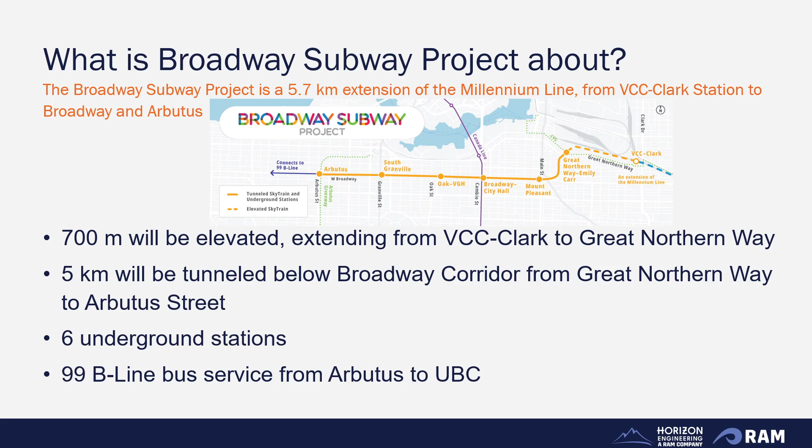In total there are 6 underground stations, and at our terminus station we have the B-Line service connecting to UBC. I believe this station is the longest of all, about 330 meters long, spanning across 2 city blocks from Arbutus Street to Cypress Street.

All these pictures I'm going to show are downloaded from the Ministry of Transportation and Infrastructure website, which is widely available to everyone. Let me show my pointer.

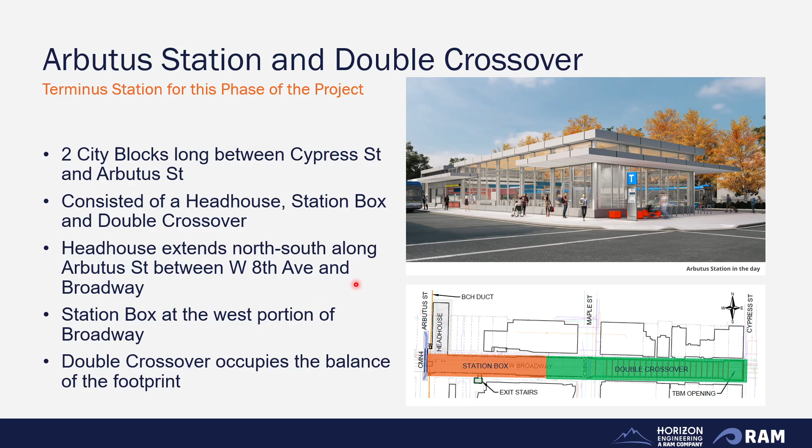Now we talk about our excavation requirements. Overall, the depth of excavation is about 18 meters, and in some areas it's as deep as 20 meters.

It is a vertical shoring design to support adjacent buildings, both at grade and multi-level underground parking. It also needs to support the traffic deck and underground infrastructure.

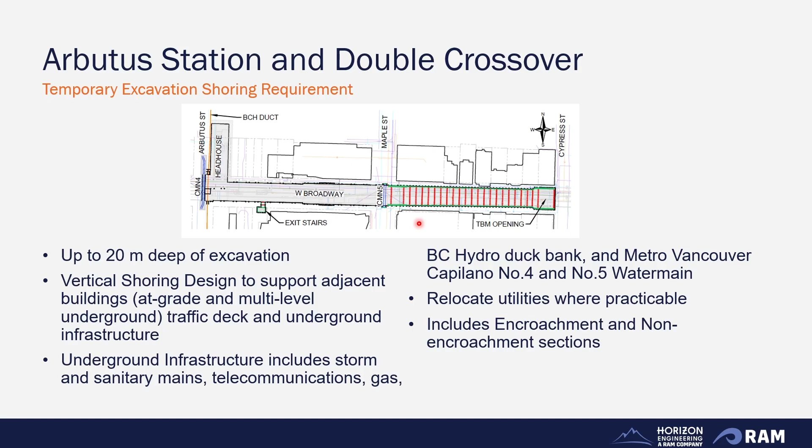Our excavation also includes encroachment and non-encroachment sections. And for all other projects, we will have to do site investigation first.

Subsurface investigation was carried out by Golder Associates and EXP in 2019 and 2021. They concluded there's a fill and superficial silt layer up to 4.5 meters deep, over a stiff to very stiff silt stratum up to 12 meters deep, followed by glacial drift and glacial till up to 20 meters deep. We expect the bottom of our excavation will encounter bedrock, which is extremely weak to weak sandstone over mudstone.

Groundwater table from the west at Arbutus Street is about 3.5 meters, down to 9 meters at Maple, and back up to about 4 meters at Cypress, where buried creek runs along Cypress.

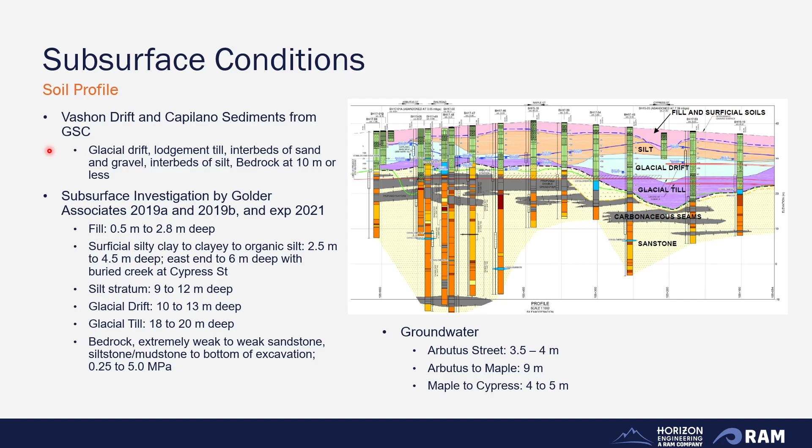Now we talk about our shoring design challenges. We divide this into 6 specific zones. Each zone we have optimized our shoring system for construction and provide a cost-effective solution.

Our shoring system also needs to manage ground deformations within tolerance limits as set by structural assessment for the adjacent buildings and all the underground infrastructure.

We also have soldier piles installed in pairs along north and south of Broadway acting as a temporary bridge for traffic to go over during construction. Most of the shoring elements, such as soldier piles, shotcrete walls, and anchors, will remain in the ground 1.5 meters below grade to satisfy the City of Vancouver's requirements.

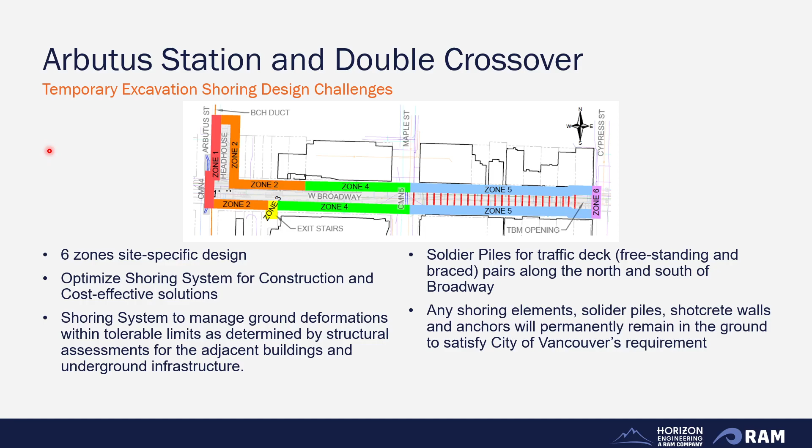Our design solution also needs to be flexible, adapt to changes, and consider construction sequencing, surcharge loading, available materials, and different geometries. In general there are 4 types of shoring systems: typical tie-back anchors with reinforced shotcrete, pipe piles with tie-back and shotcrete, and in the non-encroachment area, soldier piles with spiles and shotcrete panels, and secant piles with reinforced shotcrete and steel whalers tensioned with tie-back anchors.

Now we talk about challenges for each zone.

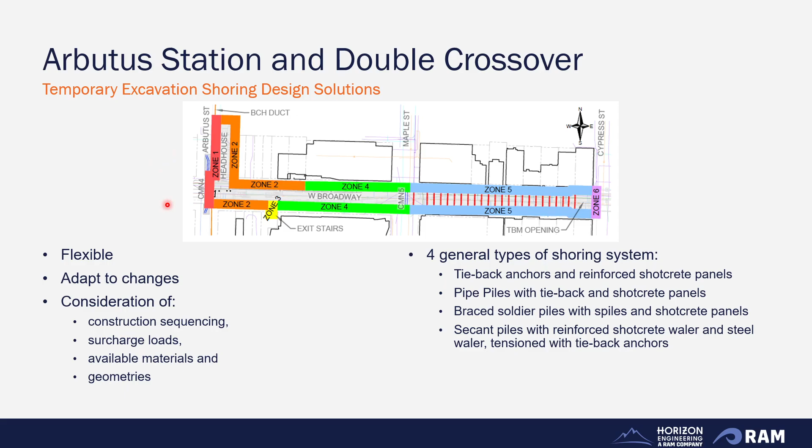The first zone is to the left here, along Arbutus Street, which we need to design to support the CMN4 and the concrete BC Hydro duct. Also, we need to design to support the mine tunnel, which is going to be opened in a later stage.

Tieback anchors are allowed in this area, but we have to provide the offset from CMN4. CMN4 is a 1.2 meter diameter water main, pressurized, about 2 to 5.5 meters below grade. The north section of CMN4 will stay as is, but the south side is going to be relocated.

The BC Hydro duct, unfortunately, we cannot relocate it, so we have to design it to be suspended across this excavation.

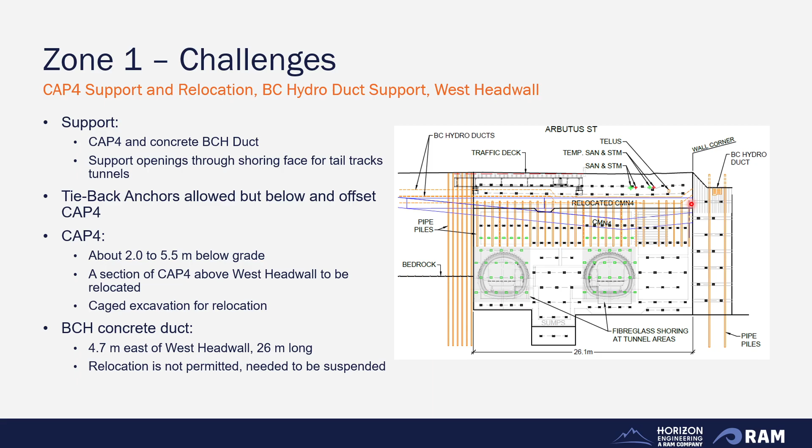Our solution for the north side for CAP4 will be installing pipe piles, 6-inch Schedule 80, up to 9 meters long, with 3 rows of anchors to secure the pipe pile. This pipe pile system acts as a cantilever retaining wall, providing lateral support for the pressure and the utilities behind it.

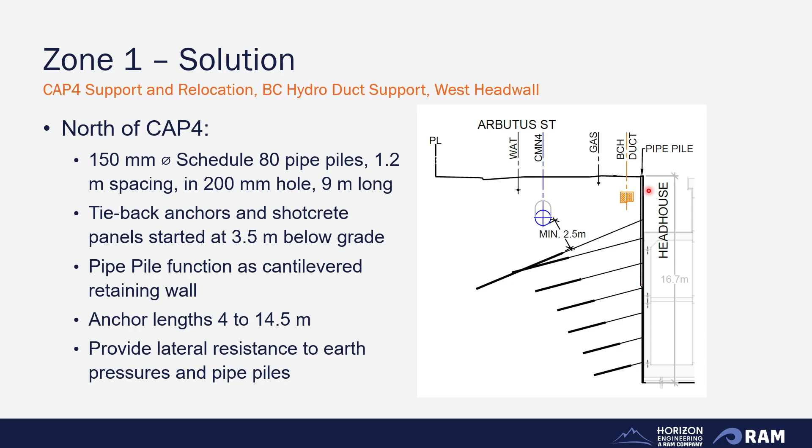To the south side of CAP4, first we need to install tieback anchors to create a bench for the new CAP4 to be relocated. Then we install pipe piles up to 5.5 meters, with 2 rows of anchors to secure the pipe pile system.

The overhanging BC Hydro ducts will have extra pipe piles on both sides, with steel structures supporting over the pipe piles, designed by others.

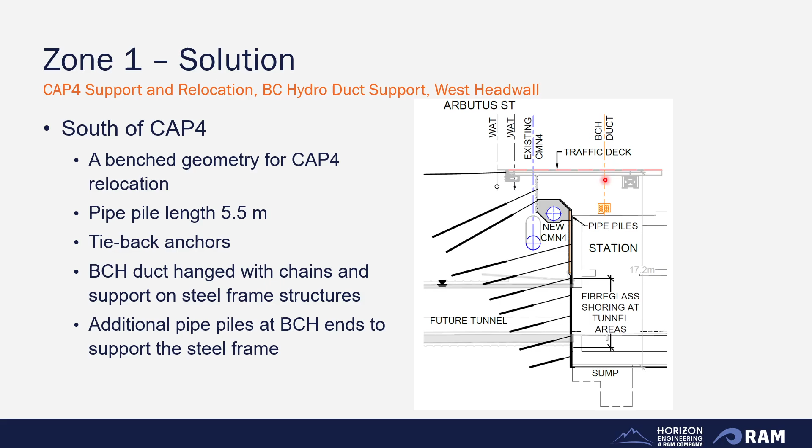For tunnel openings, because we cannot have steel elements, we have to use fiberglass rebar mat and fiberglass anchors. However, because this is a mined tunnel, we can use 35 MPa shotcrete.

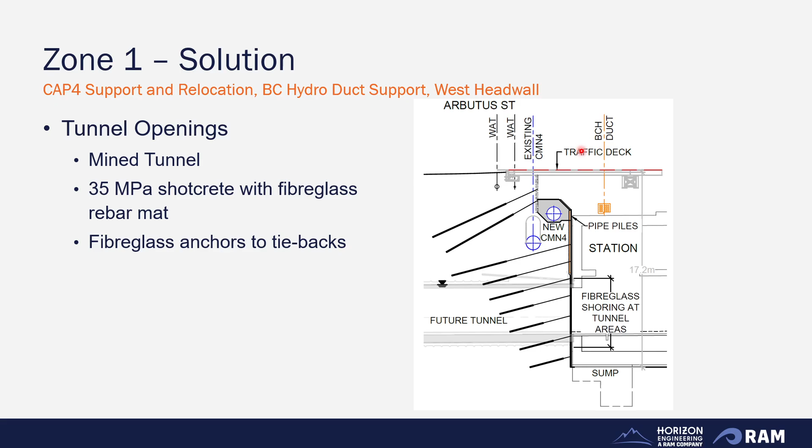So this is a picture of what it looked like at the head house area. It is about halfway below the surface. You can see this is the cantilever portion.

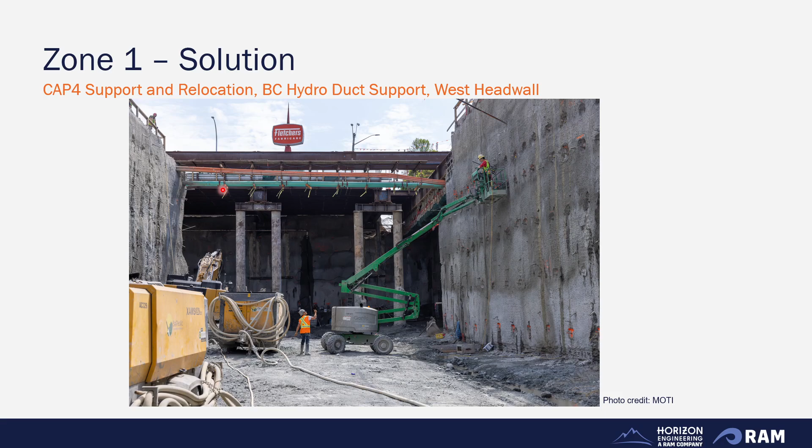It's about 4 meters, and below and behind it, this is the BC Hydro duct. It's not very clear, but you can see it's overhanging across our excavation. You can also see the orange Telus optical lines and storm and sanitary running across, which is going to be in our Zone 2 challenges.

This Zone 2 is about the north and east headhouse, and part of the north and south excavation of the station box. We need to design to support adjacent buildings, which are only at-grade structures, plus the utilities that you've just seen. We also have to include construction load and construction traffic over this north portion.

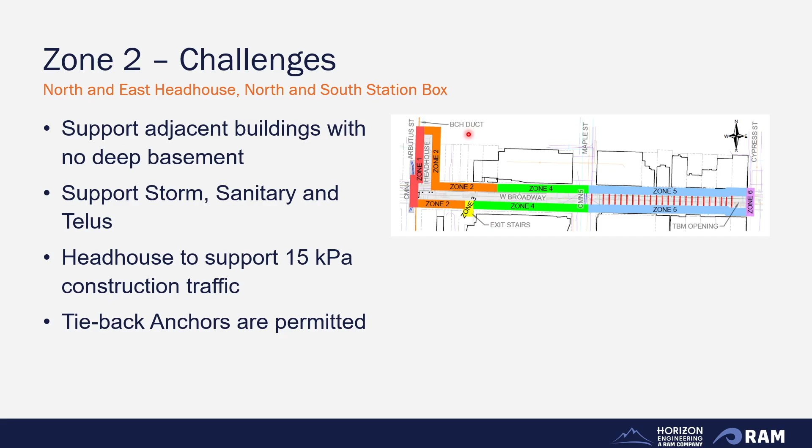Tieback anchors are permitted, and because of this, we have a very typical tieback anchor system with 9 rows of anchors, up to 13 meters long, and you can easily include traffic load.

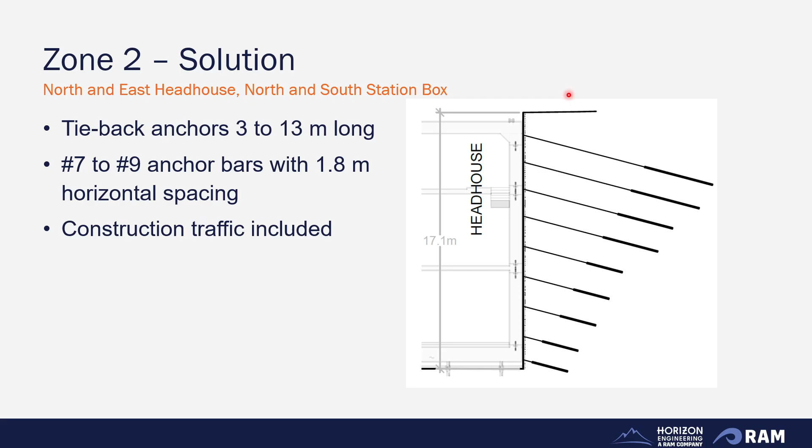For Zone 3, which is this little yellow area here, we call this the emergency exit stairs. It is not as deep as the main excavation, only about 10 meters deep, but we have a very tight space.

The exit stairs itself is only 6 meters by 9 meters wide, and the corridor connecting between the stairs and the main excavation is only about 4 by 5 meters wide. With this tight spacing, tieback anchors are not desirable to install.

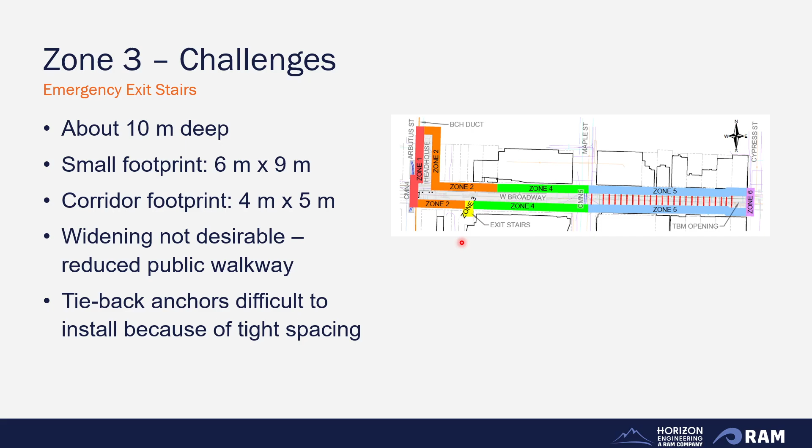So therefore, we came up with a creative solution using pipe piles and steel waler and struts. This creates a box frame structure to secure all the walls.

First, we install the pipe piles, and then as we excavate the panels in between, we connect them with horizontal rebars. As we get down, we install steel walers and struts, weld them together, and make a box frame structure. This top-down solution addresses the space constraint restrictions.

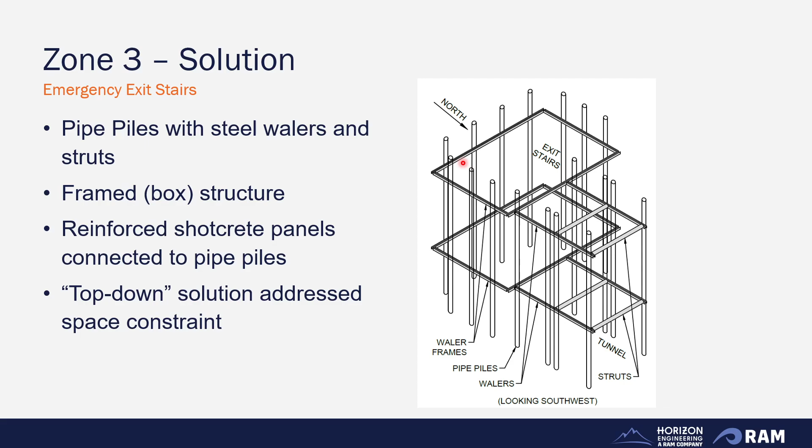Now we get to Zone 4. It is the rest of the north and south excavation up to Maple Street. We have to support multiple levels of underground parking on both sides. The excavation gets closer to the adjacent building because there's a vent shaft on both sides.

On Maple, we also have to support the 1.8 meter diameter CAP5, which is going across and cannot be relocated. This CAP5 is also pressurized and is suspended structurally using cradles, transferring all the loads to the traffic piles, designed by others. However, we have to design both faces, the north and south, to support the abutment.

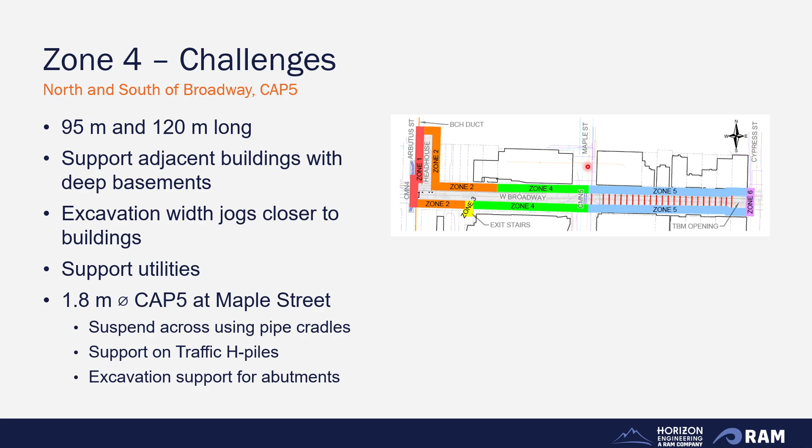Our solution outside CAP5 is pipe piles with tieback anchors. The pipe piles are up to 11 meters long, 10-inch Schedule 80. The first few rows are at very steep angles, up to 45 degrees. With this system, we can manage the deformation and support the load from the soil.

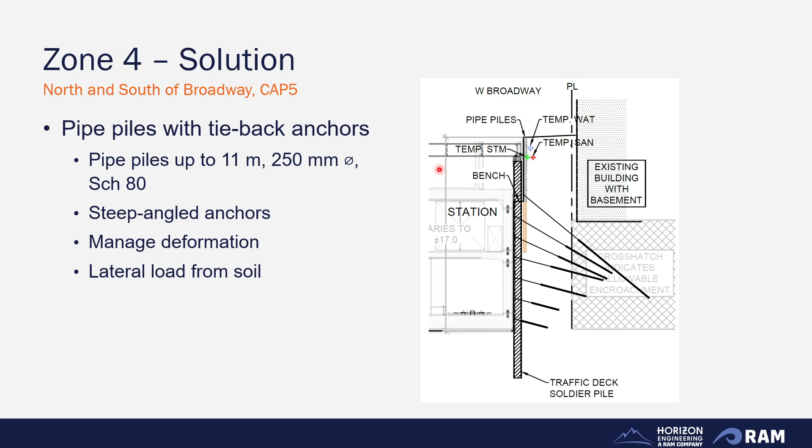This is a picture of this area. The pipe piles are up to 5 meters cantilever.

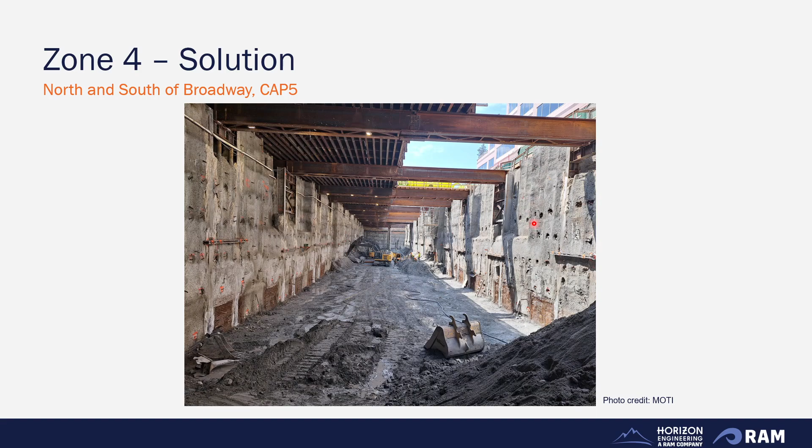For the solutions for Cap 5, we have to make a bench 5 meters deep for them to install the saddles to support the Cap 5. The back wall also needs the top of the back wall to install the concrete and steel walers for supporting the top portion of the CAP5.

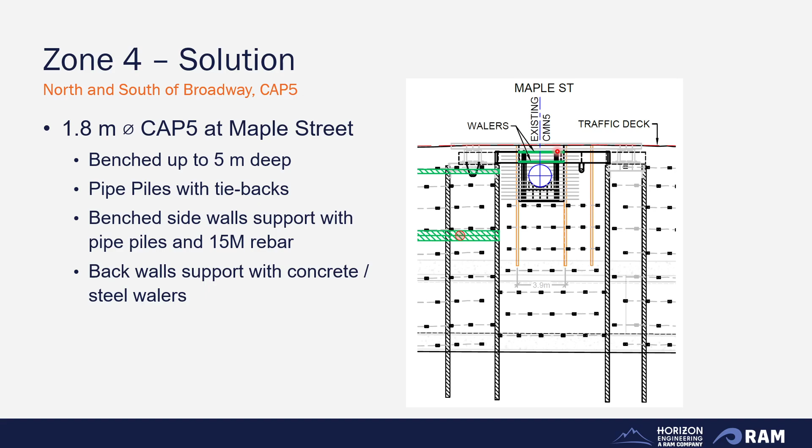This is a picture of the CAP5 spanning across. We have small saddles with steel frame structure, and all the load transferred to the traffic piles.

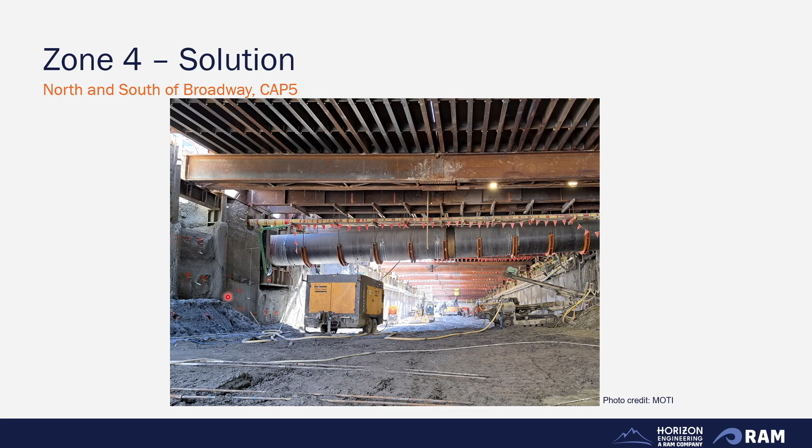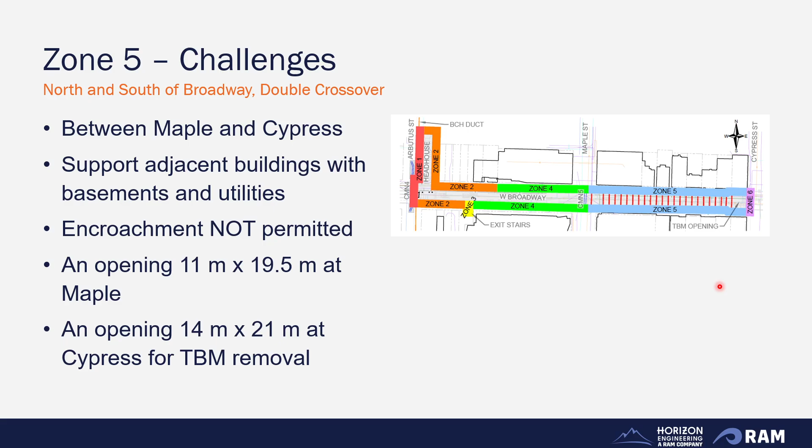Now we get into the non-encroachment area. It is between Maple and Cypress. We have to design to support adjacent buildings with multiple levels of basement, and of course, utilities. Also we have to design for 2 big openings. One in Maple is about 11 by 19 meters wide, and at Cypress, the even bigger one, 14 meters by 21 meters wide. That is for the TBM removal at a later phase.

Our solution outside Cypress will be braced soldier piles, 3 meters spacing, and we have to install reinforced rebar horizontally between the piles to provide support for the soil. Then we install walers and struts to brace both sides of excavation together.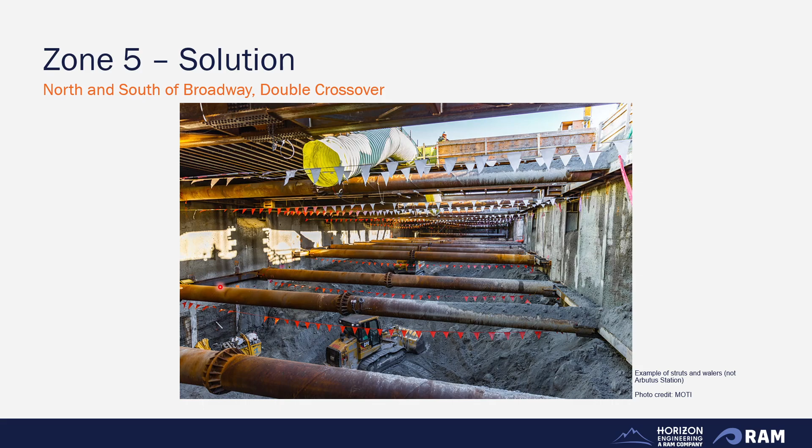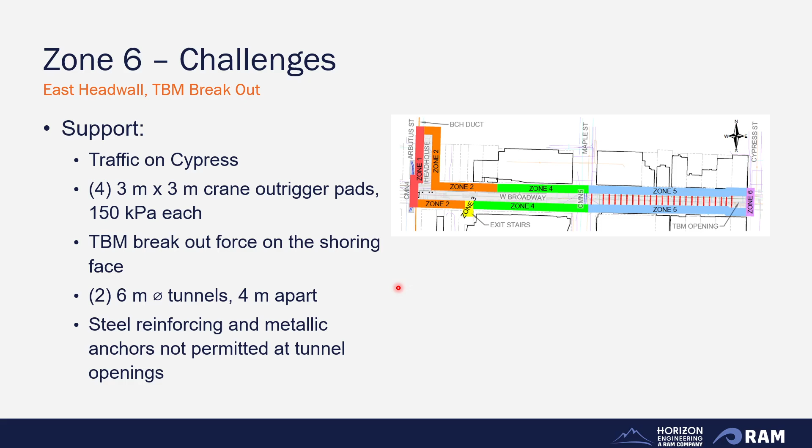Now we get to the last zone, zone 6, which is the east head wall at the TBM breakout. We have to design for traffic load on Cypress, the breakout force for the TBM when it goes through the shoring wall, and we have to design for the outrigger pads when the mobile crane came here and removed the TBM. Of course, at the tunnel openings, we cannot use steel elements for shoring.

Thus, our solution will be a secant pile wall, 900 millimeters diameter, with 10 MPa concrete. We have secondary piles with reinforced cage up to the top of the openings. Beside the openings, we have full-length H piles. We also have shotcrete and steel walers with tiebacks to secure this secant pile wall.

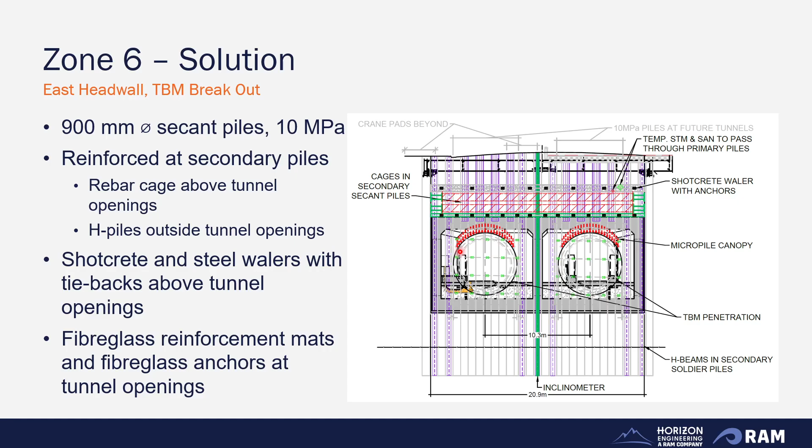Within the tunnel areas, we'll have fiberglass reinforced mats with fiberglass anchors. As I said, for the TBM removal, we have to predefine a mobile crane before, and predefine the location and the load that will be applied to this wall, considered and added into our design.

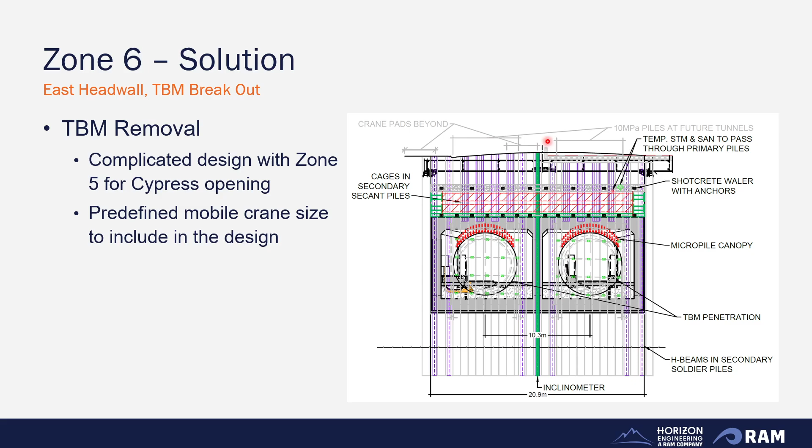Instrumentation and monitoring: we have nano sensors and wall targets installed on every building along Broadway. On CAP4 and CAP5, we have settlement gauges, inclinometers, wall targets, and on CAP5, on the steel structures, we have nano sensors and strain gauges.

On our shoring excavation phases, we have wall targets, inclinometers, strain gauges on our struts, nano sensors on some of the walls, and we have InSAR surveyed for final configuration.

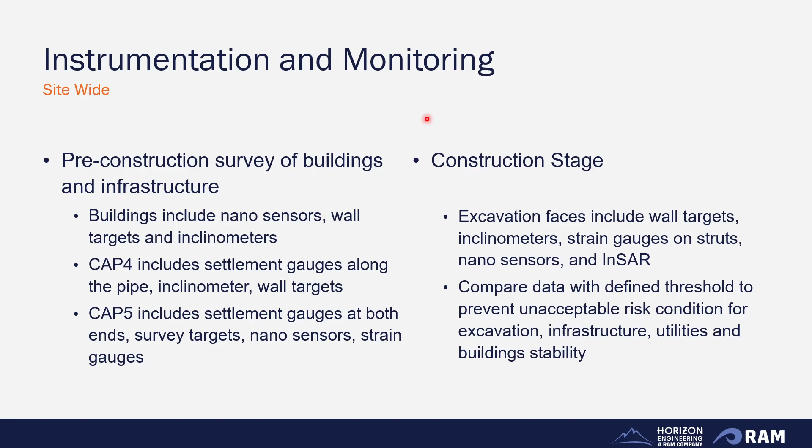We collect all these data and compare them frequently with the predefined thresholds to prevent unacceptable risks, make sure the excavation is safe, and the surrounding buildings and infrastructure is stable.

In conclusion, our design challenges require iterative effort to develop a practicable solution. We need to collaborate and communicate with different design teams to avoid conflicts and provide a solution that works for everyone. We have a lot of design constraints, which end up with a more complicated design, including changes in soil condition, underground utilities, and building basements. However, we accurately gather all these constraints information and came up with an optimum design to provide better risk management.

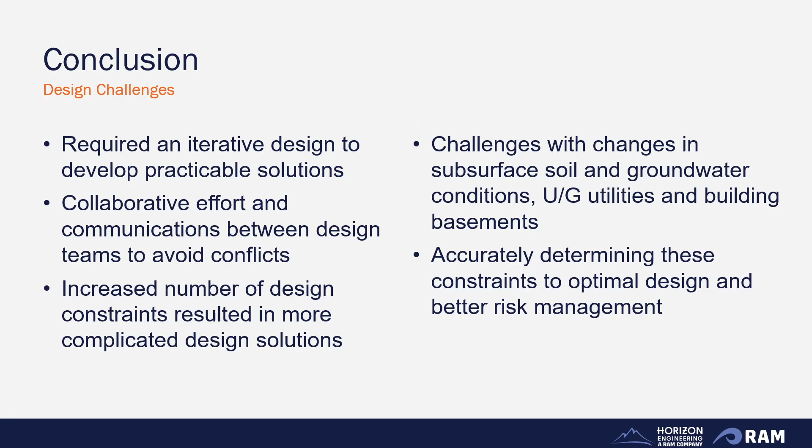That's all for my slide.